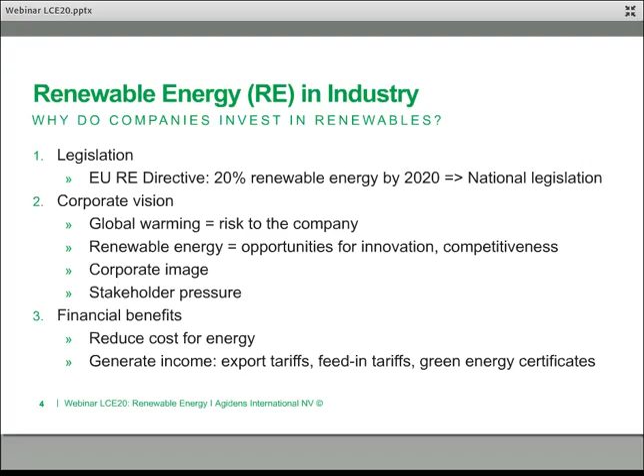If you look at overall energy consumption in industry, we're basically talking about two forms of energy: electrical energy and heat. Those two combined represent about one third of all global energy consumption and about 40% of global CO2 emissions. That is when we're talking about direct industrial energy consumption.

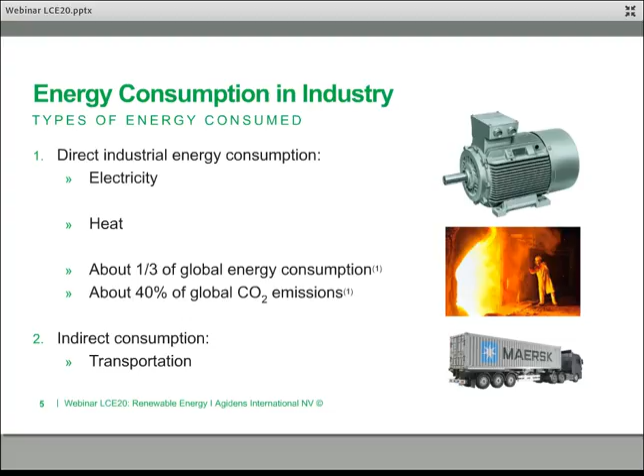Obviously, there's also a lot of indirect consumption, for instance from transportation of raw materials to a factory or transportation of finished goods away from the factory to the customers. Other things like water use also require a lot of energy. But right now, we're just talking about direct energy consumption on site of these corporations themselves.

Most of you will probably have heard of the Trias Energetica, which is the concept that you need to set the right priorities. The first thing to do, if you want to make a difference, is to reduce energy demand in itself, meaning identifying where energy is consumed and identifying waste.

Another way to reduce energy demand is to optimize the processes and settings, for instance the pressure of a compressed air network, or reducing the temperature of hot water. The second step in the Trias Energetica is to increase the energy efficiency of installations which are still using non-renewable energy. So you've eliminated waste, there's still some energy consumption left - how can you still improve on that?

By, for instance, using more energy efficient electrical motors, or having certain other components replaced that have aged, for which there are new, more energy efficient technologies available.

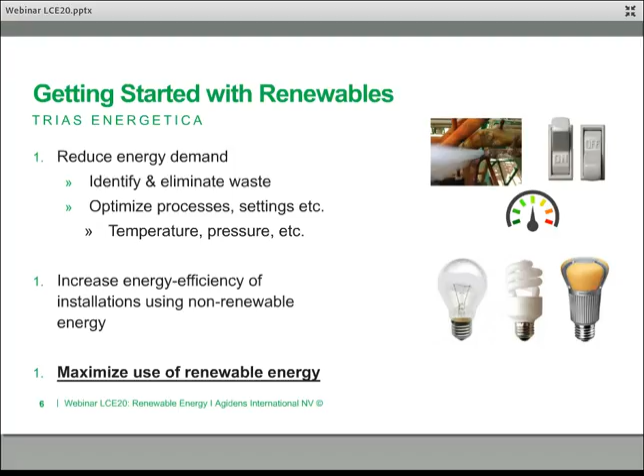The third step of the Trias Energetica has to do with renewable energy itself, meaning to maximize the use of renewable energy. So you've eliminated waste, made whatever consumption is left as energy efficient as possible, and then the goal is to use as much renewable energy as possible to cover that remaining consumption. That's the point of what this seminar is all about.

If we look at the types of renewable energy, there are many different forms. There is biomass, which can be used for heating, and through that heat you can also produce electricity. Sometimes it's turned into biofuel, which can then be used for transportation.

There is solar energy, probably one of the most well-known ones. Obviously the solar photovoltaic panels everybody puts on their house these days. There's solar thermal, where you use the heat of the sun to heat water or other liquids. There's concentrated solar, which can also be used for heating or producing electricity. And there's daylighting. One could say that is not in itself renewable energy, but I'd tend to think it is, since it avoids the use of electricity if you can just use the light of the sun to bring clarity into a building.

Other technologies include wind, both onshore and offshore - those are the big windmills, wind turbines. But also, of course, there are sometimes micro wind installations, which are much smaller ones you sometimes see on top of buildings.

Water is obviously a very important one. It is the most used renewable energy source in the world, covering about 16% of global energy production, coming from hydro - the big dams, which we'll take a look at in a second. But there's also wave energy, and water can be used as a source for cooling or heating.

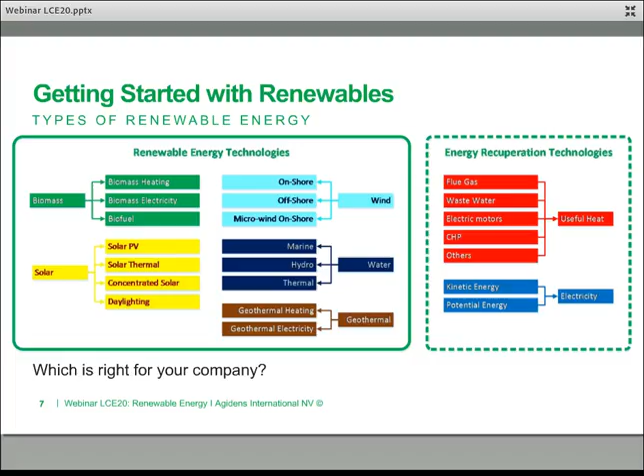Now the question, of course, is which of all these technologies is right for your company? Well, the first thing you need to do is really understand your energy needs. One of the ways to do that is to create a clear map of all your energy flows.

Once you have the proportional demand of all these different consumers, you can then look at the various process parameters and constraints, and look at the temperatures. What temperature do we need? Do we really need it, compared to what it is currently set at?

A lot of times what we see when we do energy audits for companies is that these are installations that have been there for many years, once set up at a certain temperature or pressure, and it worked. After that, people didn't want to touch the settings anymore because they were happy everything was working. But obviously things change in a production environment, and sometimes settings could have been reevaluated and updated, but it didn't happen because people were happy it was running properly.

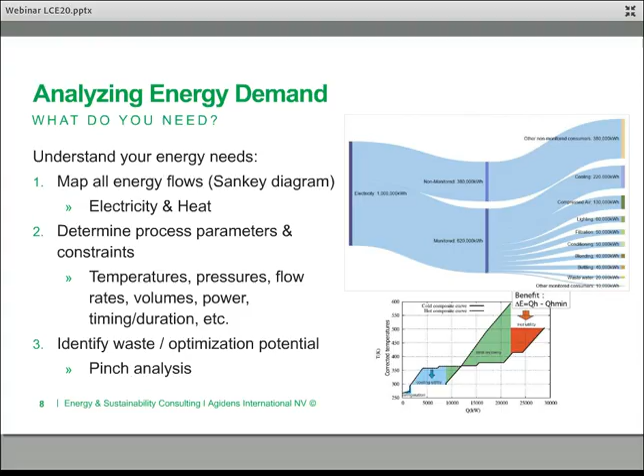Now, pinch analysis, I won't go into much further because that becomes a very technical subject. So if you're interested, I would suggest you look that up separately.

Once you have an idea of the profile and where the opportunities lie, you need to consider which renewable energy technology might best fit your profile and your needs. And that means you need to prioritize your goals and expectations.

In many cases that means first looking at the financials, because most companies are looking at profit, at investments that make sense and actually deliver on their promises. So first you need to look at what type of return on investment your company expects. Are there limits on the paybacks? We see that in many cases companies are still focusing on payback terms of 2 years or less, and that's sometimes not very easy to achieve when it comes to investments in renewable energy.

When you calculate these things, you need to think about potential subsidies or grants you may get from the government for producing renewable energy. You need to look at the income from green power certificates, for instance. You may need to look at available budget, because maybe you're in competition with other projects necessary for maintenance reasons or whatever. So obviously financial parts are the first thing to take a look at.

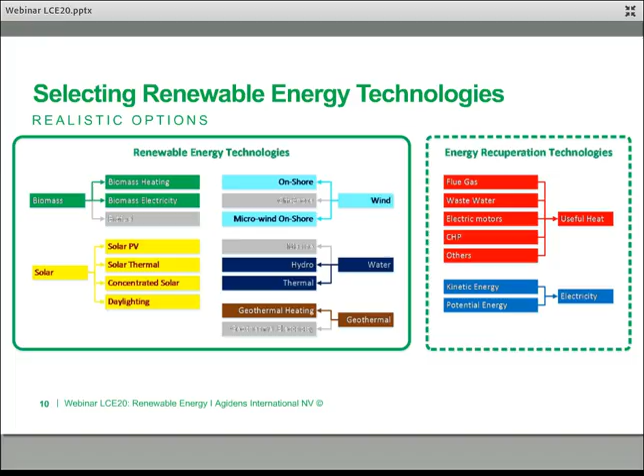Offshore wind obviously is also not really applicable since I don't know too many production sites on the ocean. Marine power, same reason. And geothermal electricity, while it is a technology fully under investigation and going through pilot projects, it is not at this point a very common technology. So for now, geothermal is mainly focused on heating applications.

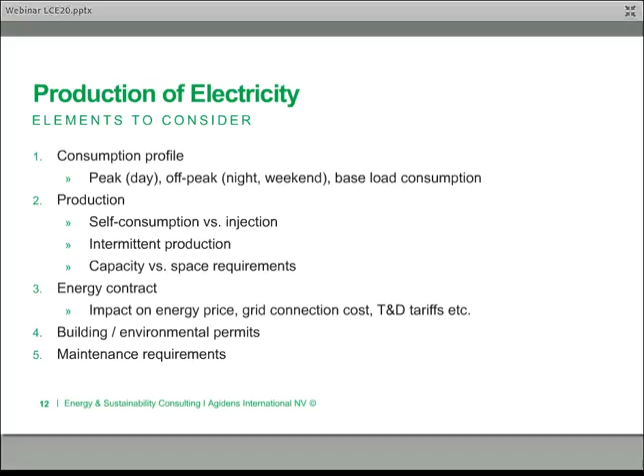Now let's go into the specifics of producing electricity, renewable power, as we call it. The things to consider are the own consumption profile that you have at your company. It's important to understand what your peak demand is, what your off-peak is during the night and during the weekends, and what your baseload consumption is like.

Because, like we mentioned before, producing energy yourself does have an impact on your contract. So you really need to be able to understand what the potential of the technology is that you're investigating, and how much of the production capacity you will be using through self-consumption, and how much of it you will be injecting into the net.

You have to take into account that production is usually intermittent, that you cannot count on full capacity 24 hours a day, 365 days a year.

You also need to think about the capacity that you would like to have versus the space requirements that you have available. A wind turbine in itself doesn't have a very large footprint on the ground, but it does require quite important zoning aspects. Same with solar panels. If you don't have space on the roof, or you have a roof that cannot carry the weight of solar panels, this significantly limits the potential that you have for solar panels at that point.

And like I said before, you need to look at the energy contract and how producing locally will impact the energy price, how it will impact the grid connection costs, the transmission and distribution tariffs, and so on. You may need building permits, environmental permits, and you really do need to think about how much extra maintenance you will need to provide for these installations.

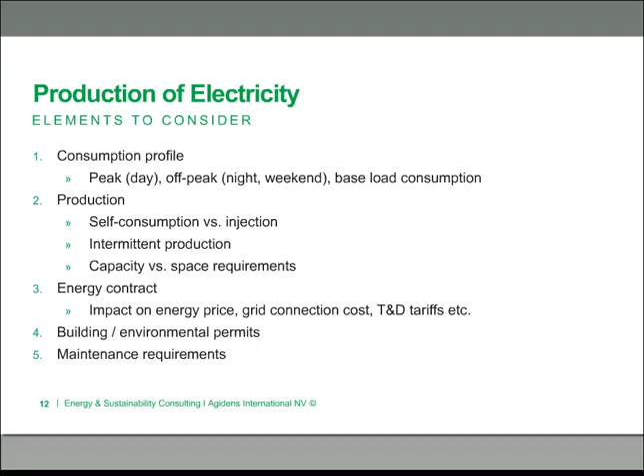It's not just a matter of investing in an installation for renewable energy and just harvesting the energy, that's it. No, in many cases there is an important aspect of maintenance that will need to be taken into account, which obviously reduces the gain that you have from renewable energy.

So when we talk about renewable power, one source that we mentioned before was biomass. Now, if we talk about biomass, we're talking about hopefully self-generated waste streams or purchased biomass. With self-generated waste streams, I'm thinking, for instance, a brewery can have the grains, the spent grains, and the various products that they use to produce beer.

At the end of the line, they have a product that used to be sold as animal feed. Well, perhaps it may turn out that it's a better financial model to use it as a biomass source for heating. Other examples are companies that make wood products and have a lot of shavings or sawdust, which can turn that into pellets or briquettes to be used in an incinerator.

So usually we're talking about industrial waste, co-products, food waste, agricultural residues, and so on. And when we're talking about producing electricity with this biomass, we usually go through an anaerobic digestion process through which biogas is produced, and that biogas is then usually combusted in a combined heating and power module or through a fuel cell.

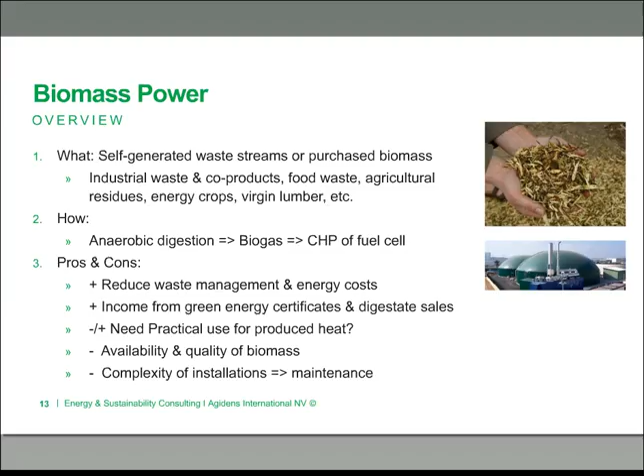Another, more common method of producing electricity is photovoltaic solar power, where you have different types of solar panels. You have monocrystalline panels, which have the highest efficiency rates, up to 21%.

They have the longest life. They perform better in low light conditions and warm climates, but they're the most expensive panels, and they do have an impact if they get dirty or are under shadow. You see a significant drop in production.

The cheaper panels are the polycrystalline panels, which are simpler in production, but have lower efficiency and lower heat tolerance. Finally, there's the flexible film, the so-called thin film solar cells, which are fairly cheap.

They offer important advantages in that they're flexible and can be glued to a surface that is not straight. They look more homogeneous.

They have fairly good heat and shadow tolerance, but the efficiencies are quite low, so you need a lot more space to use this for the same capacity than you do with monocrystalline panels.

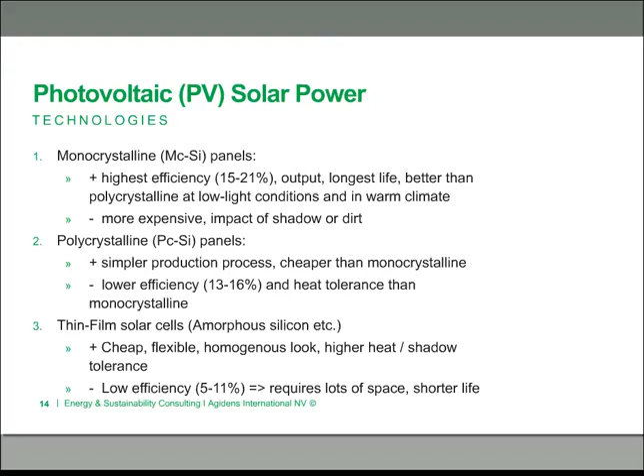Important to know also that with PV panels, these can usually be roof mounted, but there are ways to integrate them into buildings as well.

The advantage is that all these types of panels and film are common, affordable, reliable technology with limited maintenance requirements. They offer a certain level of visibility, which may be good for the corporate image.

But of course, there's intermittent production, and there's a significant impact based on where you're located. Obviously, the south of Spain will get a whole lot more sun per year than the northern part of Ireland, for instance.

There are solutions to provide more electricity by putting panels on a tracker, which tracks the sun. These panels by themselves produce up to 30 to 40% more electricity.

However, you need more space because they need to be farther apart, and the maintenance and investment costs are much higher.

The next one is wind power. These big guys are popping up everywhere.

Your horizontal axis wind turbines have now reached a technology where offshore they are going up to 8 megawatts in capacity, which is quite amazing. These are the latest prototypes.

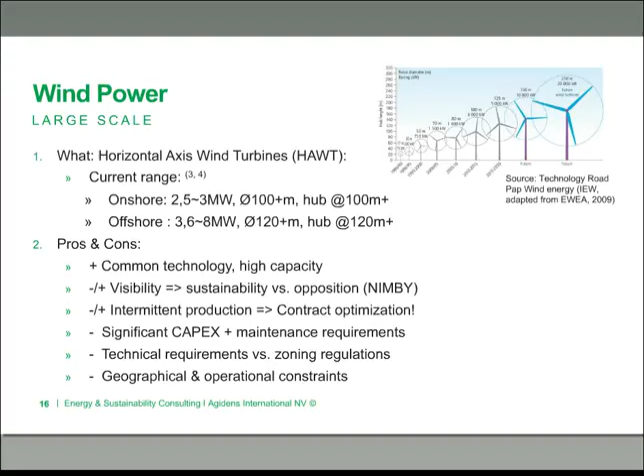Next to the horizontal wind axis, there are also vertical axis windmills, which tend to be smaller in capacity, although the largest one currently is in the 4 megawatt range, which is quite big as well.

One advantage of the vertical axis windmills is that they can take advantage of sudden gusts and peak wind, because they don't need to turn into the wind first. They take the wind from all sides.

But we tend to see these solutions more for small wind, micro applications.

So basically, I think this slide you can take a look at yourself. Wind power, it's an important one, but obviously it's intermittent again, and there are some problems sometimes to get these things installed.

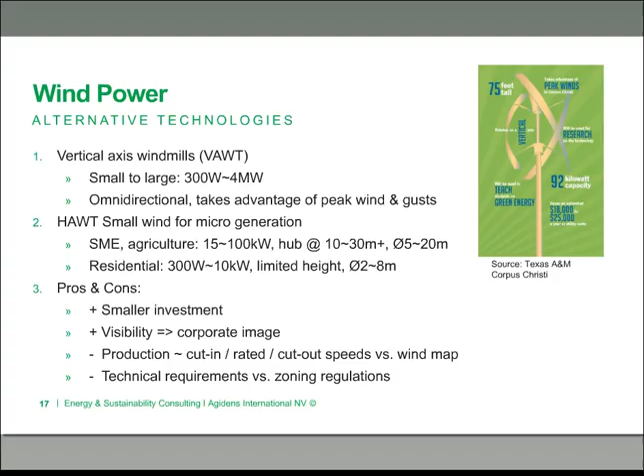That type of technology currently covers about 16% of global electricity produced, so it's just really important. It does, of course, have both environmental and social impact.

I think we've all heard stories of people or entire towns in China that had to move to build new dams and so on. There's an impact on fish, on dry land, obviously, as well.

And what we see is that there's not much development done for small capacity or low head applications so far. There's also an impact of availability of water and drought, things that may become more important as global warming continues.

The big advantage of these hydroelectric systems is that they can both provide peak load and base load and storage, and they can react fairly quickly to changes in demand. So these are quite flexible systems.

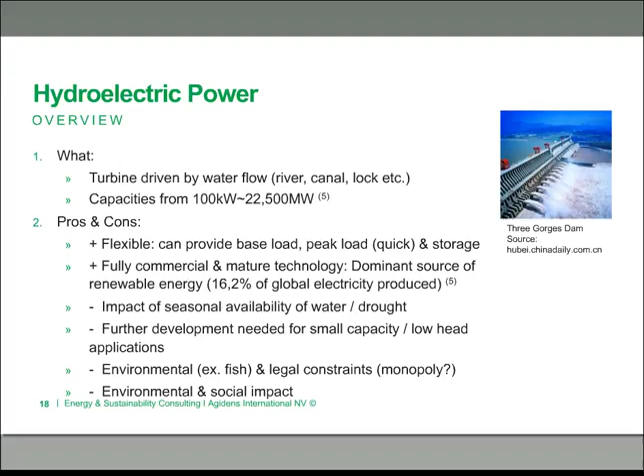Now let's get to the renewable heating part of the presentation. Again, important to consider for these investments is your consumption profile. You need to have a very clear understanding of what temperatures you need, in what volumes, and the timing of those needs.

If we look at industrial heat demand in Europe, there's been studies done, and basically you can divide the needs up in three levels of heat, going from low temperature heating, which we define more or less as up to 100 degrees. That's good for about 30% of heat demand in Europe. Usually this type of heating is used for space heating, for washing, rinsing, food preparation, etc.

Medium temperature is between 100 and 400 degrees centigrade, which is good for about 27% of demand. That type of heat is usually used for evaporation, drying, steam as a heat carrier, and so on. And then there's high temperature applications, which is above 400 degrees, good for about 43% of demand, and we see that mostly in the manufacturing of metals, ceramics, glass, etc.

Heat production can be done via flue gases and via electric induction, among others.

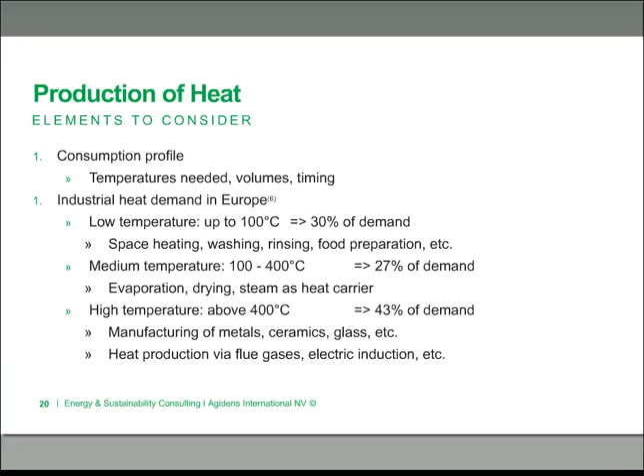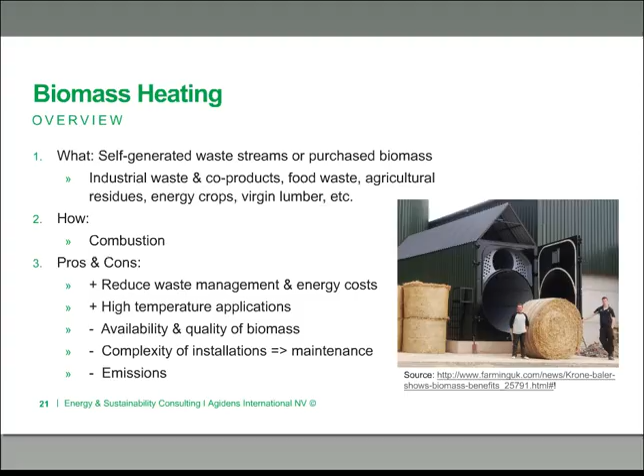Having said that, while it is a simpler application and easy to understand, it doesn't mean that it is free of maintenance. The installations themselves do require quite a bit of maintenance, and emission controls are also quite stringent on these systems.

Solar thermal heating, there are various technologies for that, starting with the traditional collectors that we see on residential roofs sometimes as well, the flat plates. These are usually well suited for low temperature applications. It's a common and reliable technology, but obviously, depending on the geographical location of your site, you may or may not get a lot of production out of it on a yearly basis.

One step up is the evacuated tubes, which can reach higher temperatures. So we're talking about low to medium temperature applications. And they are also able to heat larger amounts of water in shorter time. They are more complex in construction and therefore are more expensive in cost as well.

And then the next step up from there is concentrated solar, or concentrating solar, really focused on medium temperature applications. Important there is that you will tend to need storage, which again requires space requirements. It's higher investment, and the largest systems here tend to be used also for power generation, where you basically have hundreds and hundreds of meters of mirrors all concentrating onto one focal point where steam is produced and power is produced.

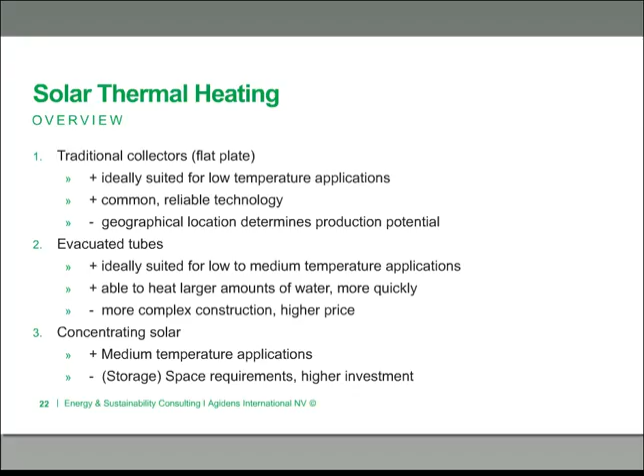Geothermal heating, there we have also different levels. We have shallow geothermal, which is usually what is used for domestic use for residential homes. These can be horizontal tubes or vertical tubes up to 150 meters deep. Usually you can get about 10 to 14 degrees centigrade out of the ground temperature. And through the use of a heat pump, you can then pump this temperature up to a higher level, for instance, to be used in a home for floor heating or so on.

Once we go deeper than that, we can go to deep geothermal applications, which is really what industrial and utility scale projects are like. It's been shown that at a depth of 2,400 meters, you're reaching about 90 degrees, which is ideal for heat applications.

But there are now several pilots running where they want to go even deeper than that. And estimations are that at a depth of 10,000 meters, for instance, the temperature is reaching 374 degrees centigrade, which obviously gives you temperatures that allow direct power production through steam that comes up from the ground. And the idea there is that over time, people could use steam-based gas turbines, but instead of using gas, they just use the steam from deep geothermal.

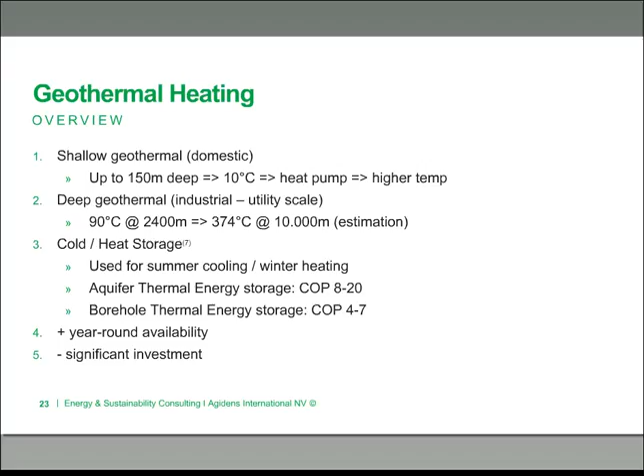The efficiency levels can go quite high. If you're using an aquifer thermal energy storage, you can reach a COP of up to 20, which is quite amazing. The main advantage of geothermal is year-round availability. However, you do need to take into account that these require significant investments.

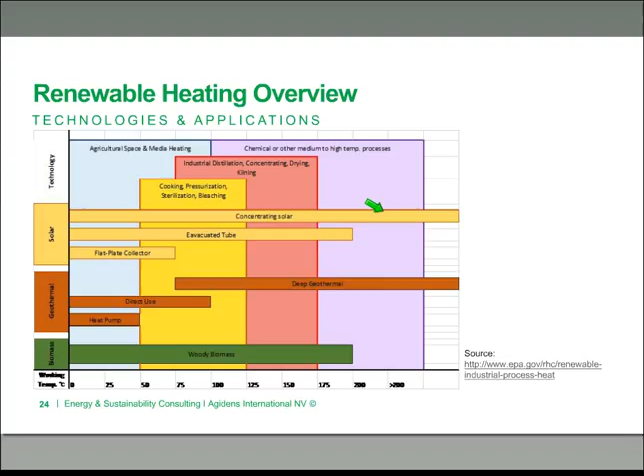So this is an overview. I invite you to take a look at this in the PDF, it will be a little bit more clear, but it shows you the distribution of working temperatures versus applications, going from space heating up to around 100 degrees centigrade, whereas for chemical applications and high temperature processes, it's from 100 to well over 200 degrees. Based on these different applications, you can then see which specific technologies fit the temperature range you're looking for. I invite you to take a look at that in the PDF file you'll get later on. I see from timing that I need to hurry up a little bit.

I mentioned daylighting also in renewable energy, because basically using daylight is simply avoiding the consumption of electricity for TL lighting or LED lighting, or worst case incandescent lighting. The advantage with daylight obviously is that you have lower cost, and usually a good light color and color quality. Problems with daylighting are that sometimes, if it's through a window or a clear canopy, you get a strong contrast between the light beam and the shadow, and obviously there's intermittency and a seasonal impact.

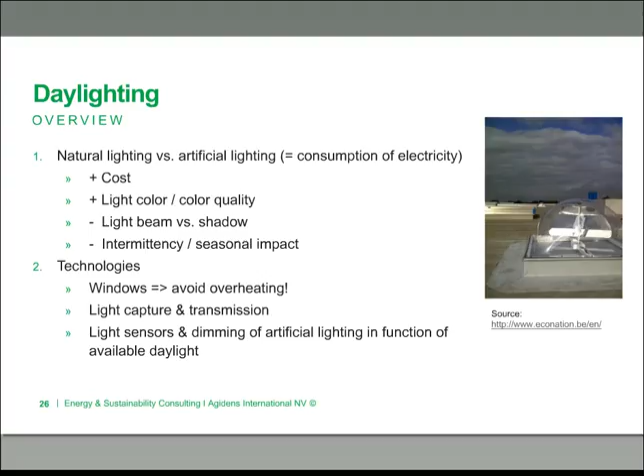Technologies you have to think about: if you're talking just regular windows, you need to make sure you don't overheat the space in summertime. But there are solutions to capture light and transmit it more efficiently, like the light catcher you see on the right. And of course, you want to outfit your artificial light indoors with light sensors and the possibility of dimming in function of the available daylight that comes into the building.

Another thing I wanted to mention was energy recuperation, because as mentioned before, there are a lot of forms of wasted energy. Flue gases, when you have processes that burn certain products or ovens that are heated - a lot of times you have flue gas at temperatures still very much useful for other applications, especially low to medium temperature applications. A lot of energy is available in flue gas. Similar for wastewater - low temperature applications are very common.

Electric motors that are running all the time create a lot of heat, and there too you can recover the heat. For instance, the compressors for compressed air networks are ideally suited for low temperature energy recuperation. Combined heating and power electricity production obviously doesn't make sense if you do not recuperate the heat. Other applications may still be possible.

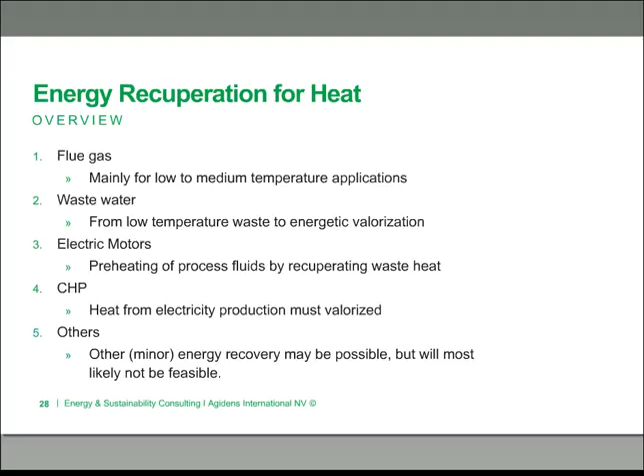Then when you're talking about kinetic energy, we're talking about braking energy. For instance, in automated warehouses, you have stacker cranes that can easily be converted to recuperate the braking energy. Instead of converting that energy into heat, they now can create new electricity and either store it through a supercap or inject it into the net. In addition, you have the advantage that you can do some peak shaving, and you can also reduce the wear and tear on your installation.

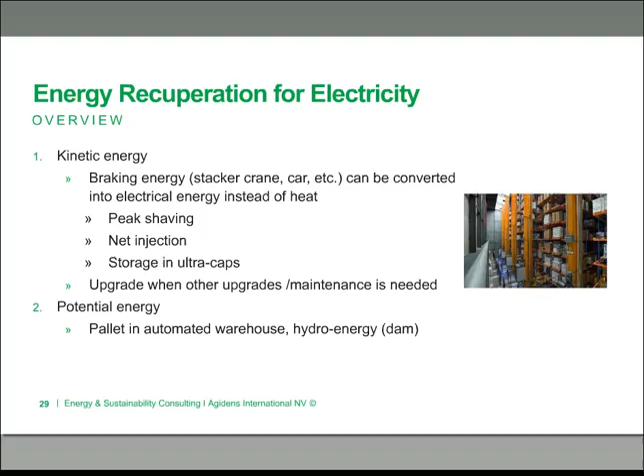Some conclusions. When we see trends in renewable energy, we see that renewable energy is expanding at an ever faster rate than before. In 2014, nearly half of all global net new capacity worldwide was renewable. And actually the latest news I saw was that in 2015, more new capacity was added through renewables than through fossil fuels, which was good news. The expectation is that by 2020, about two-thirds of new capacity will come from renewable energy.

If we look at the price or cost forecast, we see that onshore wind power has dropped on average 30% in the period 2010 to 2015, and is expected to drop another 10% by 2020. And for utility scale photovoltaic, we've seen a drop of 66% over the past 5 years, and another 25% is expected for the next 5.

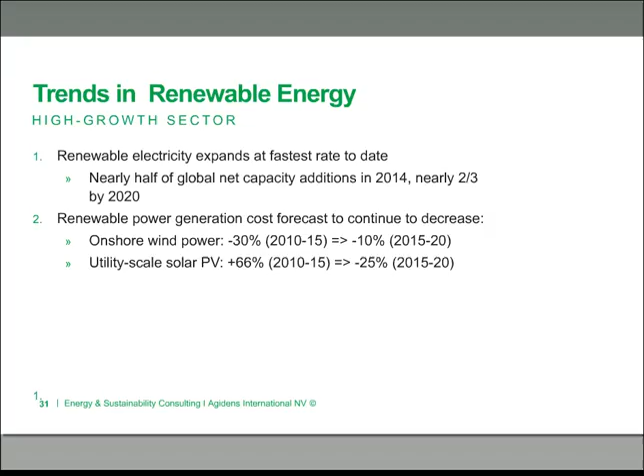While barriers to renewable energy - obviously oil prices are currently extremely low, abnormally low, and that means the return on investment calculations, the payback calculations, are less favorable for renewable energy. We also see that the carbon markets are still not very effective. There's still overcapacity in power generation from nuclear, coal, and gas, and these are all putting pressure on the economic numbers behind renewable energy.

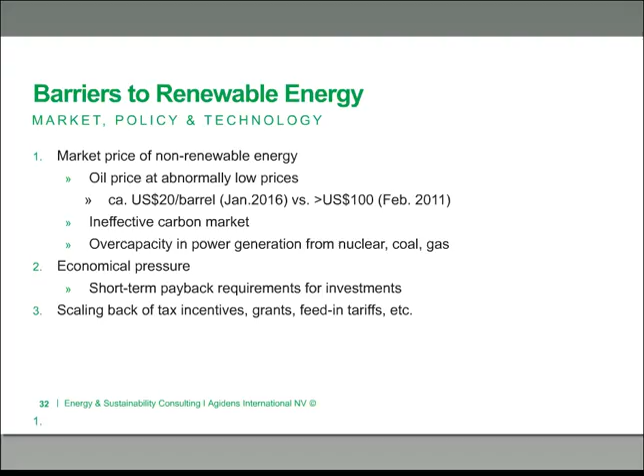Nevertheless, even with scaling back of tax incentives, grants, and feed-in tariffs, we very much believe in the power of renewable energy and in the need for renewable energy. And I think it's clear that a lot of jobs can be created from there. I look forward to getting some questions from you all. I hope everything I presented was clear. You have some source material here as well, and I invite your questions at this point.